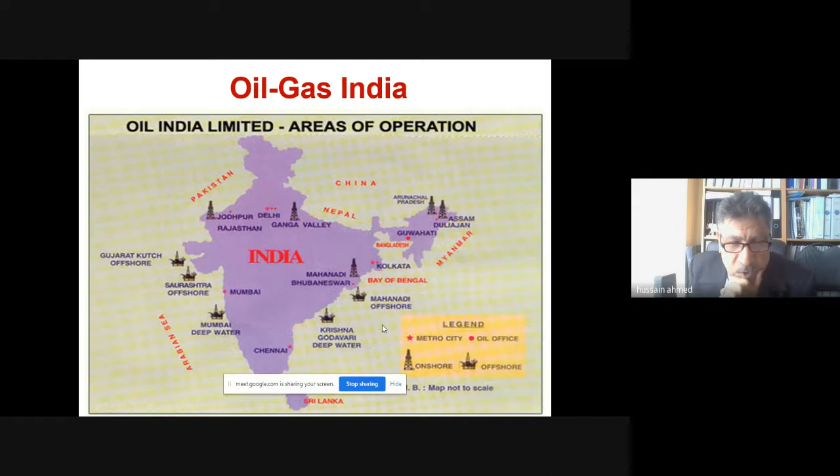And this small map shows you the location of the oil and gas, both onshore and offshore, present in India. I think that's your area, correct me. You are here, aren't you? You are in Rajasthan. And you have an onshore oil field here. Assam, the northeast, is rich with oil and gas, but your area is also rich with oil and gas. You have oil and gas also offshore, both on the east and west, such as in Mumbai High, the deep water. Offshore, you also have some oil and gas in the Chennai area. Most of the offshore is gas, and most of the oil is onshore. So you have some oil and gas in India which need to be developed.

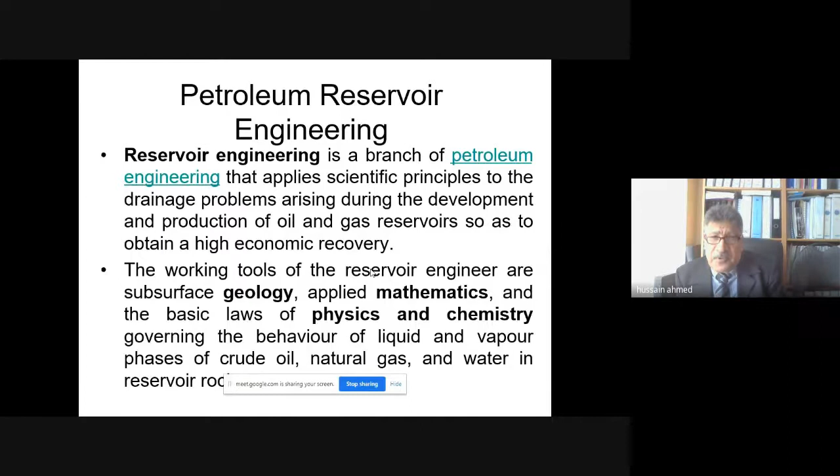And reservoir engineering also looks into how much oil in place, reserve, how do they calculate it? And also they look into the properties of the oil inside the rocks, such as: is it natural gas? Is it wet gas, dry gas? Is it heavy oil, light oil? So they do PVT and also economic studies.

The reservoir engineer also later on does something with enhanced oil recovery, EOR, such as water injection, gas injection, to maintain the pressure of the reservoir. So reservoir is quite an important topic within petroleum engineering.

If you graduate as a petroleum engineer, and then you specialize as a reservoir engineer, maybe MSc reservoir engineering, or you work as a reservoir engineer, these are some of the roles. A reservoir engineer will be responsible for estimating how much oil in place, forecasting the development, what do I need to develop in my reservoir, my field.

By the way, oil field and reservoir. Reservoir is smaller than the oil field. One oil field may be made of 3 or 4 reservoirs. Reservoir is the name of the rock that has the oil inside it. Reservoir is a French word, which means a tank or a vessel. So that rock having oil inside it, we can name it the reservoir. Sometimes we say reservoir formation.

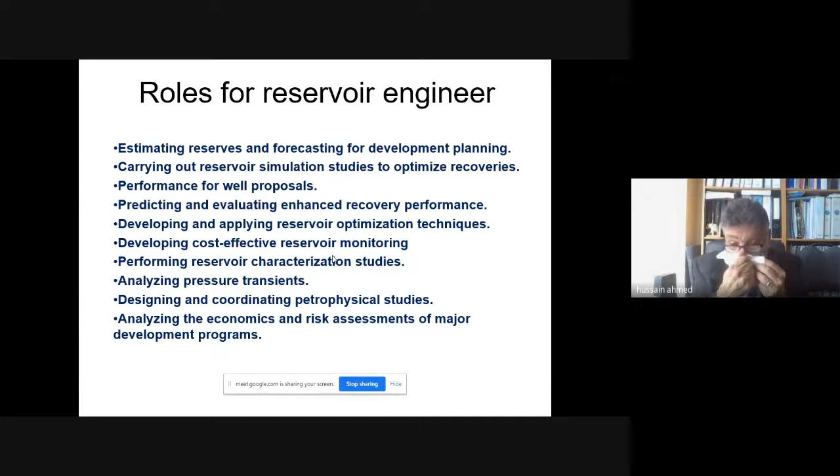The first oil well in the world was in Pennsylvania. It was drilled in 1859. It was only 70 feet or 69 feet.

The other thing about the reservoir, you need to know the rocks, because the oil exists inside the rocks of the reservoir. The reservoir rocks are of three types. Either sandstone and shale, which we call clastic sedimentary, or chemical rocks, and these are the salty rocks such as anhydrite and gypsum.

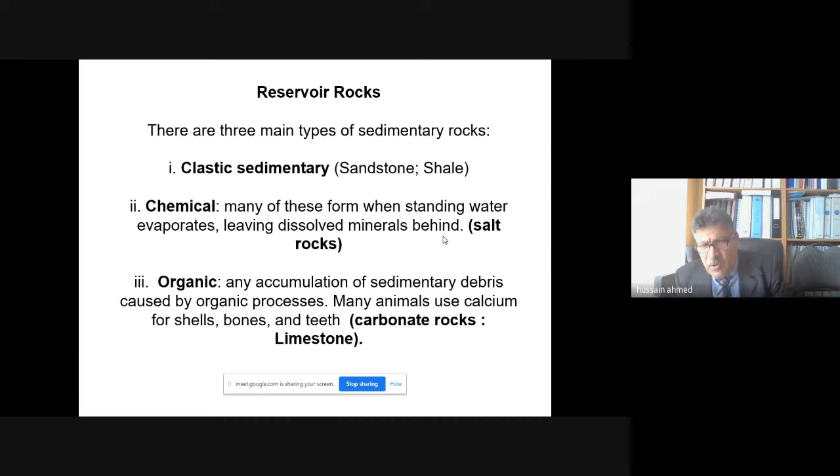And there are a few very small reservoirs made of salt. They call them the salt domes. I will show you some pictures later on. So remember, the name of the rocks where you can find oil and gas: either sandstone, shale, salty rocks, or the carbonate rocks, which is limestone

and dolomite. Of course, oil starts in deep rocks. They call them the source rocks. Source rocks are like the kitchen where you cook your oil first.

And then after that, the oil will move from the source rocks to the other type of rocks. A good example of source rocks is shale. So shale has oil. I'm sure you heard nowadays about shale gas and shale oil, which people try to get oil out of because they are source rocks.

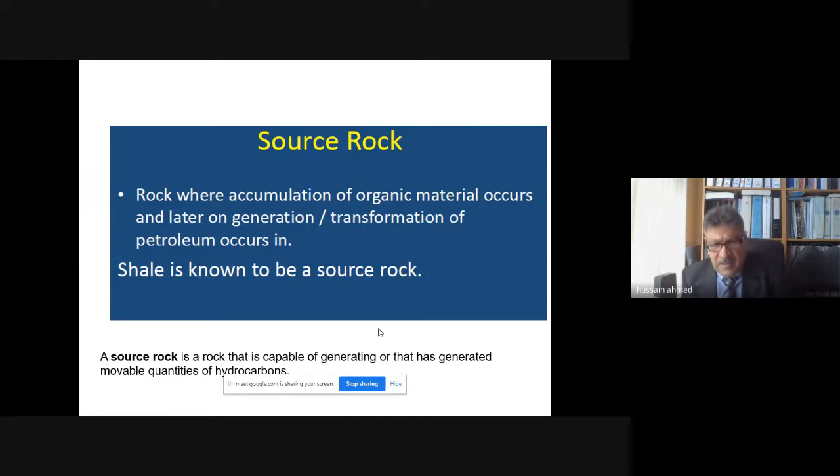After the source rocks, the oil being generated moves into the other rocks, which is sandstone or limestone or dolomite. They move in a process called migration. Migration is movement of oil from the source rocks to the other type of reservoir rocks, which you call the traps. The other types could be sandstone, limestone, salt domes, or shale.

And the movement will be either due to density differences, buoyancy, or due to hydrodynamic, which is kind of pressure differences, or capillary actions, which is the capillary movement. And therefore, we change from source rocks to other type of reservoir, which we call the reservoir rocks or the reservoir accumulation.

This is buoyancy. So remember, if somebody asks you how does the oil move from the source rocks to the reservoir, from shale into sandstone or into limestone, either by buoyancy or hydrodynamic or capillary action.

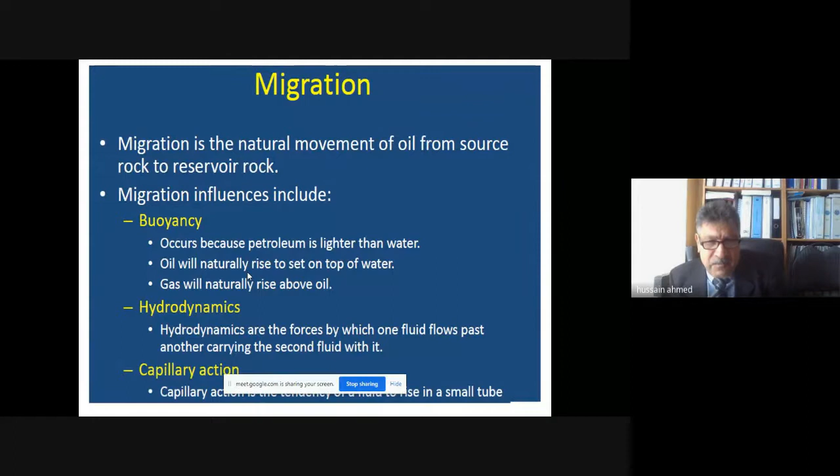For the students, if you have a piece of paper and pencil, make a note of this information because this information does not exist in books. It comes from my experience. So the buoyancy, and then explore hydrodynamics. I will pass very fast.

Then that movement of oil from the source, being captured inside the reservoir rocks, we call that traps. The oil being trapped inside that rock. The type of traps could be folding or faulting. As we said, we have fault and we have anticline. Stratigraphic, which is lithology, rocks on top of each other. Or sometimes we have a combination, which is a mix between structure and stratigraphy. I'll give you examples here, for example.

Nature, geology. I'm sure petroleum engineering year 1 and year 2 teach you some petroleum geology, and also civil engineers teach you some geology as well. You know geology, structural geology, soil, and so on. And I'm sure you heard about fault, like an earthquake.

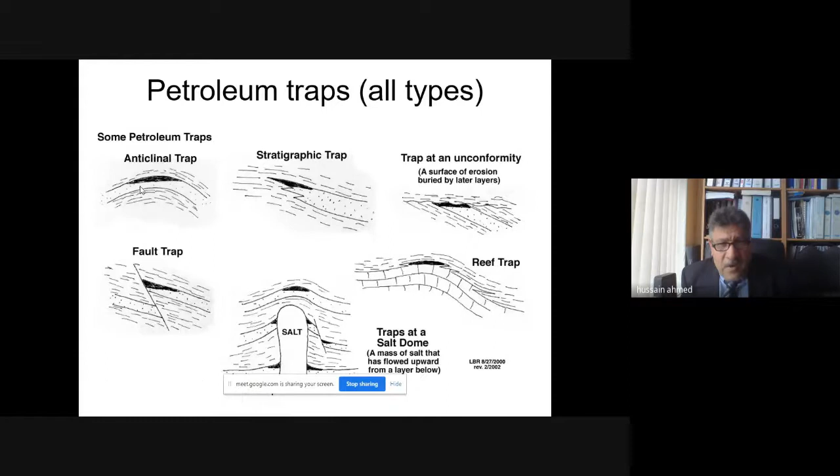The oil is trapped by movement from the source rocks because of buoyancy, hydrodynamic forces, and they move. If they don't find any seal rock, they will escape and you can see them on the surface of the earth. We call this a seep, the escape of hydrocarbon from underneath to the surface of the land. I have seen that in Iraq - we have so many seeps there, gas and oil, especially in the north part of Iraq. Sometimes the oil also leaks into the offshore under the sea because there's nothing sealing it.

That thing sealing it, we name the cap rocks. So this sealing rock, we call the cap rocks. If you don't have cap rocks, then the oil and gas will escape into the open nature.

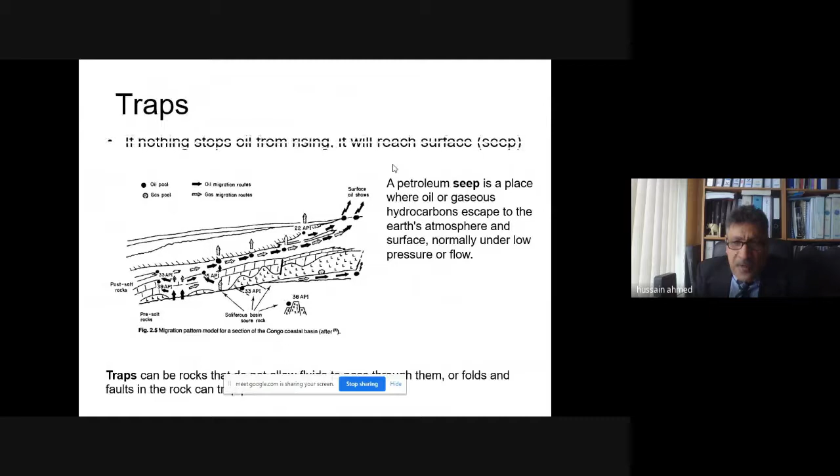These are the 5 elements in reservoir engineering. First, you have to have something called source rocks, where the oil starts to be generated because of high temperature and pressure, and the dead animals living here undergo organic changes that turn them into liquid. That liquid is the hydrocarbon, and then it starts moving after that.

So after source rocks, we have something called migration. Remember, these are the 5 principles in reservoir engineering: you have to have source rocks, then when the liquid is generated, it starts moving because the pressure in the source rock is high, so it moves from high pressure to lower pressure, either by capillary action, by buoyancy, or by hydrodynamic forces, and they move until they are captured into a piece of rock we call the trap rock.

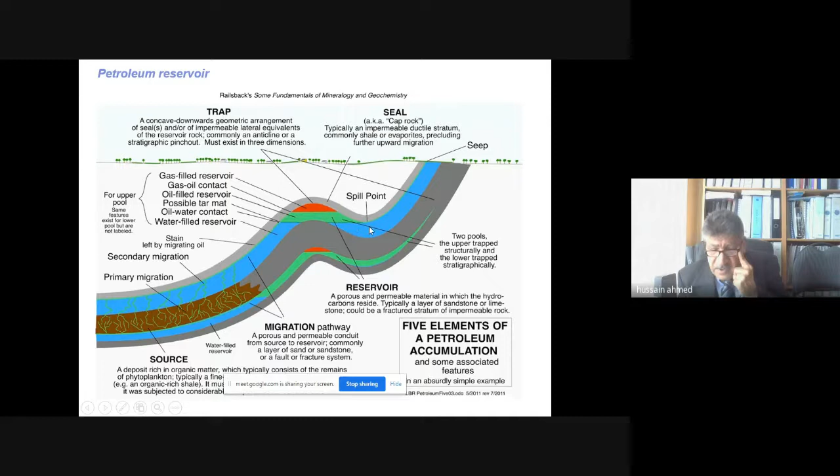That is the reservoir. It should have 2 or 3 important properties. One, it has something called porosity. Our lecture today is about reservoir properties. Porosity is the space where the oil will occupy part of the rock, the empty part. The oil will go inside this empty area, which we call porosity.

If the oil is moving from source to the reservoir, it moves through channeling inside the rocks. That channeling inside the rocks, they call permeability, permeable. So we have 2 important properties in a reservoir rock: one, it should be porous, meaning we have a space; number 2, it should have channeling.

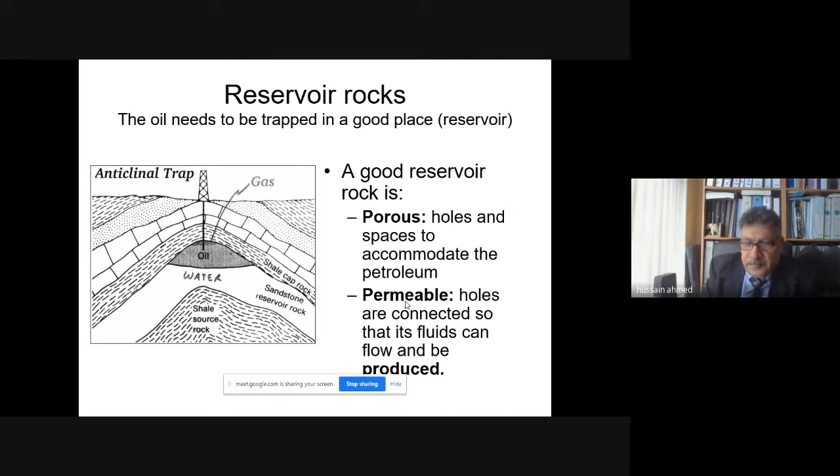So the oil reserve has a connection with porosity, with porous. And the oil production has a connection with permeability. This first word has a connection with how much oil is in the place, reserve. And permeability has a connection with production and movement. These are important features in the reservoir rocks. You should have porosity and permeability.

Porosity you can measure as a percentage. We say this rock's porosity is about, for example, the sandstone, limestone I mentioned to you already. Porosity is a percentage of the rock's voidage, or space within the body of the rocks. So if you say limestone has a porosity of 25%, then the space within that rock is 25% of its volume.

And maybe some of that territory is occupied by oil and gas. Does the oil and gas occupy all the porous volume? Sometimes no, it will occupy a percentage of it. So porosity is important as a space, a room to live in, to stay inside it. And then if the oil wants to move, it has to have something called channeling.

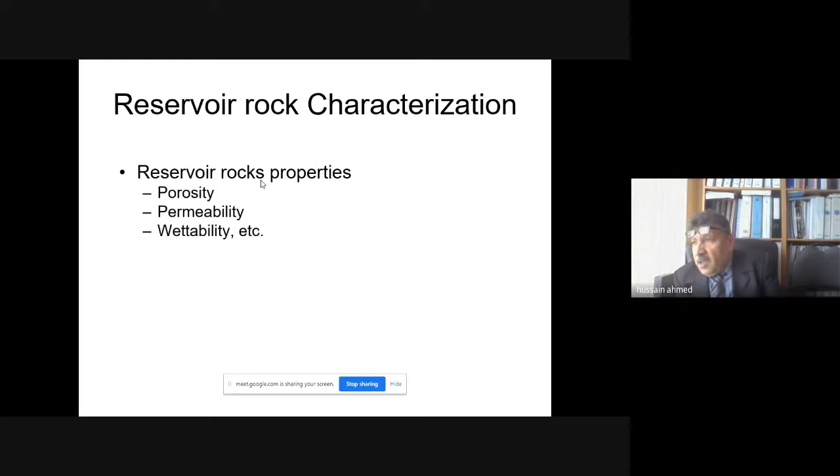So porosity, permeability, and the other important property we call wettability. Wettability is a tendency of oil and gas to saturate the rocks. So I have a piece of sponge, I put it into a pool of water. How does the water move inside the sponge and make it wet? That's wettability, the ability of the oil and gas to be adhesive to the body of the rocks. We will mention that later on as well.

The other important property of the rocks - remember porosity, permeability, wettability - number 3 is temperature and pressure. These temperature and pressure of the reservoir depend very much on the depth. There's a rule saying the deeper you go, the more the chance for gas accumulation, because you have high pressure and high temperature.

For example, on the y-axis, the depth in meters, after 4,000 meters you may find more gas rather than oil. But in a shallow area you may find more oil, though it tends to be heavy oil. For example, in Oman, if you get a job there, most of the oil fields are shallow and most of them are heavy oil.

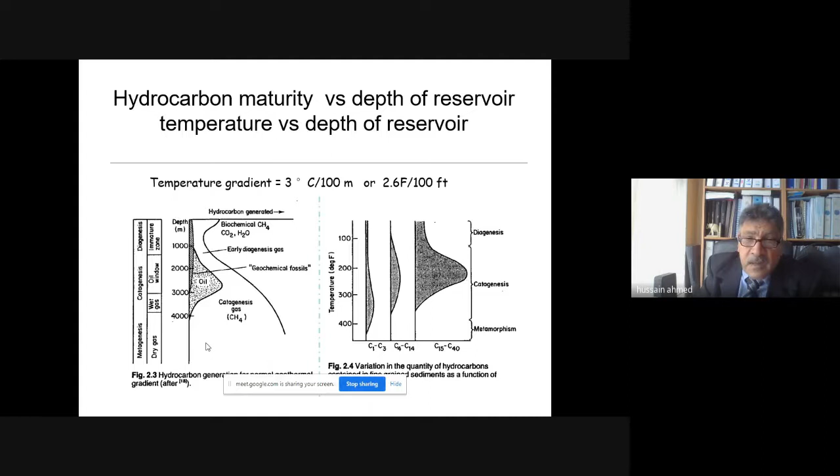You can predict the pressure and temperature of the reservoir by a small basic calculation. This is the way to calculate the pressure: PR of a reservoir equals 0.433 multiplied by depth in feet. So if somebody says my reservoir is at 10,000 feet, what will be the pressure? You tell him 10,000 multiplied by 0.433 equals 4,330 psi. That's the normal, most normal value.

Sometimes we have abnormal pressure, sometimes hydrostatic, and sometimes dynamic pressure. But generally we use the pressure gradient of 0.433. Sometimes it could be 0.44, sometimes 0.53, depending on the geology structure of the reservoir. But the majority are between 0.433, sometimes 0.456. The temperature also you can predict using this simple equation in Fahrenheit: surface temperature, maybe 70 Fahrenheit, plus 2.6, that's the temperature gradient.

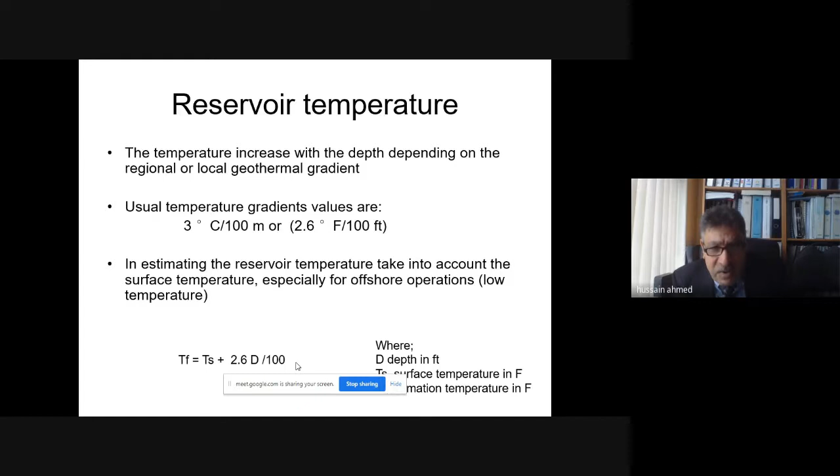So remember these properties of reservoir. We need to know about porosity, permeability, wettability, which is in other words saturation, pressure, and temperature. These are 5 important properties for a reservoir to be understood or to be followed. And we mentioned the reservoir pressure, how to calculate.

The rocks, we have mentioned rocks in reservoir could be sandstone, limestone, dolomite, and shale. 4 types of the rocks are very famous and common for reservoir: sandstone, limestone, dolomite, and shale. Most common, sandstone and limestone. Dolomite is less, shale is less.

And the properties, we say porosity, the pore volume, and porosity come as a percentage. So it's 20%, 25%. We have mentioned already these things. And this is the way they calculate porosity. I'm not going to show you how to calculate, because I'm not giving you an academic lecture. I'm going to give you a training. But as a petroleum engineer by now, if you are 3rd year petroleum engineering, you should be able to calculate porosity, or know how to calculate porosity.

Most of the oil fields around the world, porosity between 15% up to 25%. More than that is not good. It would be a loose sand production. We have something called interconnected, we have effective porosity, we have bulk volume, we have primary porosity, secondary porosity. You can talk about this very much, but for me, no time to talk about it in details. So primary, secondary, effective porosity, absolute porosity, different names you can talk about.

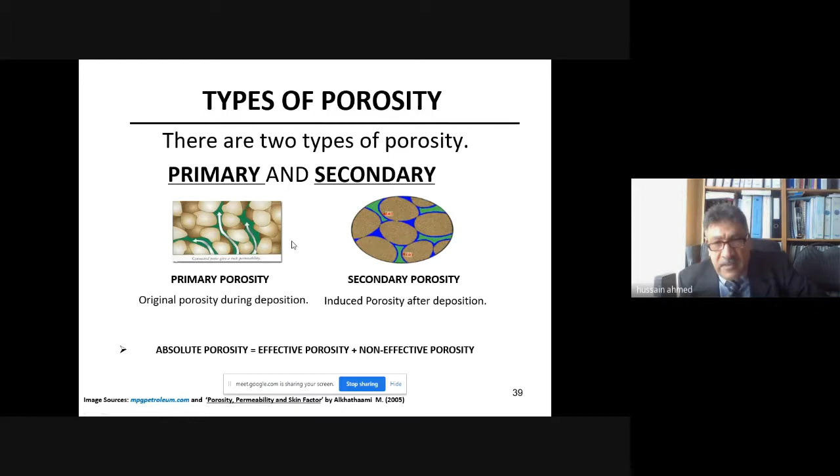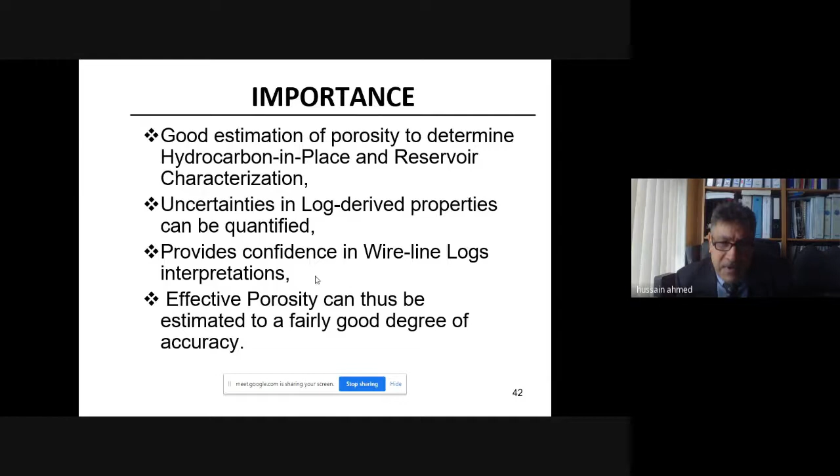Saturation of oil in the reservoir is a percentage of porosity. So if somebody said to me the oil saturation is 60% in that rock, that means 60% of the porosity is being occupied by oil. That's the meaning of it. I repeat again, if somebody said to me, we have 60% oil saturation, what does it mean? It means 60% of the porosity is being occupied by oil. That's the meaning of saturation.

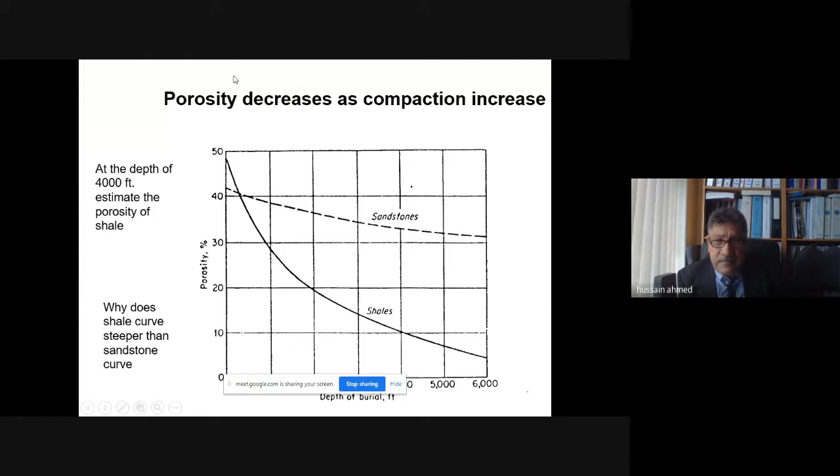Of course, porosity has connection with depth. The deeper the reservoir, the less the porosity. So as you go deeper and deeper, we will get smaller porosities because of the compaction. The other important property is for production. And remember now, porosity is good for reserve, how much oil in place, and saturation. Permeability is good property for production and movement, channeling.

And permeability tells me about the interconnection channels in the body of the rocks, which will make the oil move from A to B, from X to Y, due to the pressure differences. So the permeability is like small pipelines inside the body of the rocks, channels inside the body of the rocks. Permeability is measured in a unit called millidarcy, and the millidarcy sometimes is a very small unit.

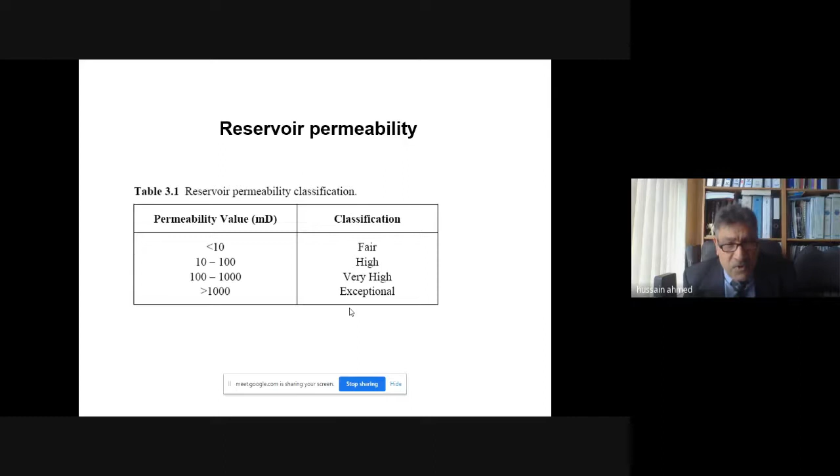The majority of reservoirs are within 10 to 100 millidarcies. Unless you have fracture, big channeling, we call it exceptional, we may get more than 1,000. But normal rocks have between 10 to 100. Limestone and dolomite, their permeability is larger than permeability in sandstone, because most of the limestone rocks are fractured. Just a piece of note for you.

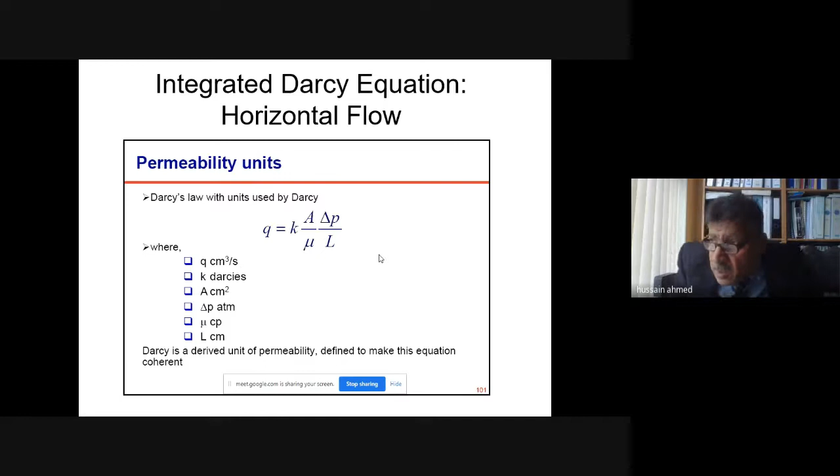So permeability is important in movement of oil in the body of the rocks. And they use permeability later on for the calculation of flow. So the flow, the movement, has a connection with permeability. But the storage has a connection with porosity. Remember these two words. Make a note of them. Permeability has a connection with flow and movement. Porosity has a connection with storage and capacity.

I will continue. This is the way they calculate permeability as K. And this is the equation used to know the flow inside the rocks. They call it the Darcy equation or Darcy law. I'm sure civil engineers know the Darcy law, and petroleum engineers also know Darcy law. Darcy law or Darcy equation tells you the movement of oil inside the body of the rocks.

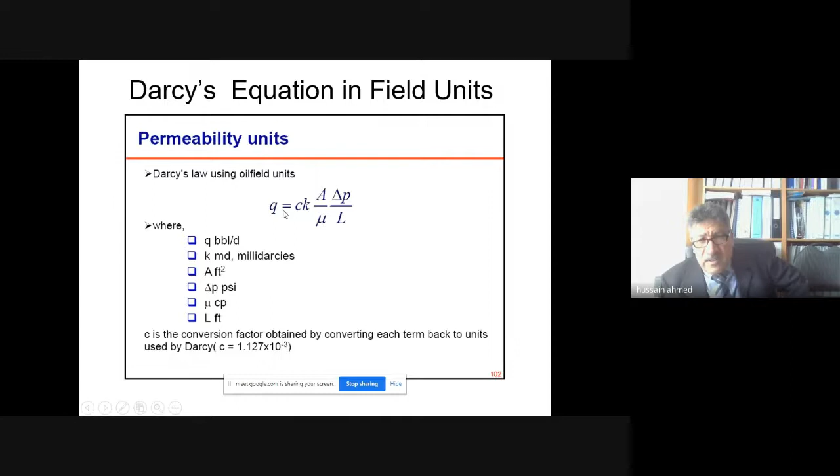Depending on the value of K, a constant conversion factor, the area of contact, pressure differences, the viscosity of oil, and the length, the distance it is moving, that tells you the flow rate, which could be written in field units. So if I work in Burgan oil field, Rumaila oil field, Saudi oil fields, and Mumbai Bay oil fields, they calculate the flow rate of oil using this equation.

That's why sometimes we need to do fracturing, sometimes acidizing, penetration, perforations, just to make the channels. So if the channels inside the body of the rocks, K, is very, very small, your production will be very small. You need higher production, then maybe you need to do fracturing or acidizing or perforation or horizontal drilling. K is very important for production. Very, very important.

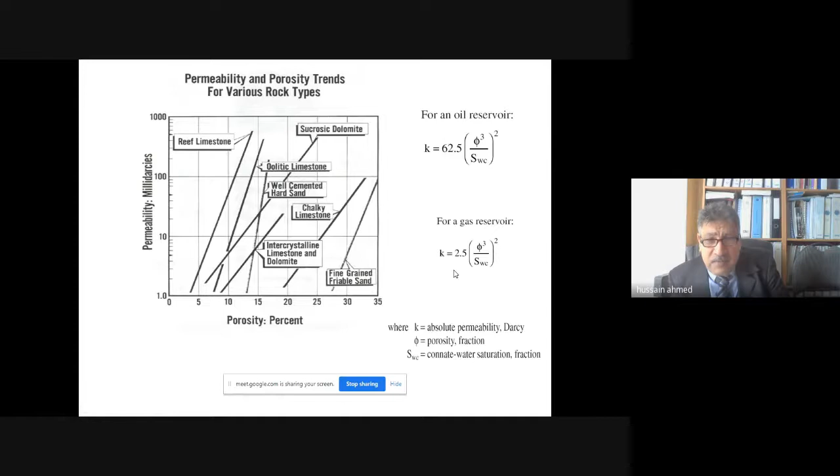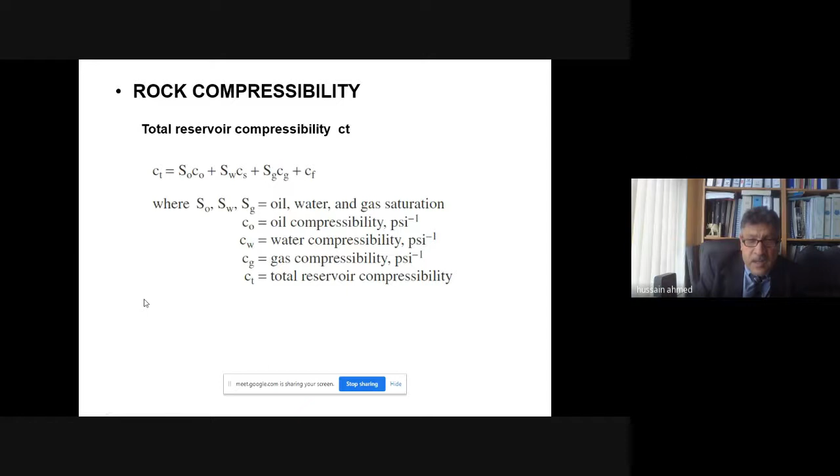The other property of the reservoir rocks is compressibility. If I take the oil out from the reservoir, then that reservoir will subside, get lower, crash down. That's a possibility. Small value, so the rocks could be compressible due to high pressure on them or due to taking the oil out of them. These are some equations to calculate the compressibility of the rocks, and this is the total compressibility. So the rocks are also compressible, and it's very important in offshore engineering to take that into consideration.

Because they produced the oil for 10 years, they took the oil from the reservoir, not much pressure to maintain the overburden pressure, so that caused subsidence, which is really a mechanical issue that could damage the pipelines, the casing, the cementing and so on. So it's also an important property to think about. I repeat them: porosity, permeability, wettability, compressibility.

I will come to more later on. These are important properties: the pressure and temperature of the reservoir. So pressure, temperature, porosity, permeability, wettability, and compressibility. Six properties so far. Make note of them. They are important properties of the reservoir. You need to know them. Tomorrow, if you graduate and get a job as a petroleum reservoir engineer, you need to know these things.

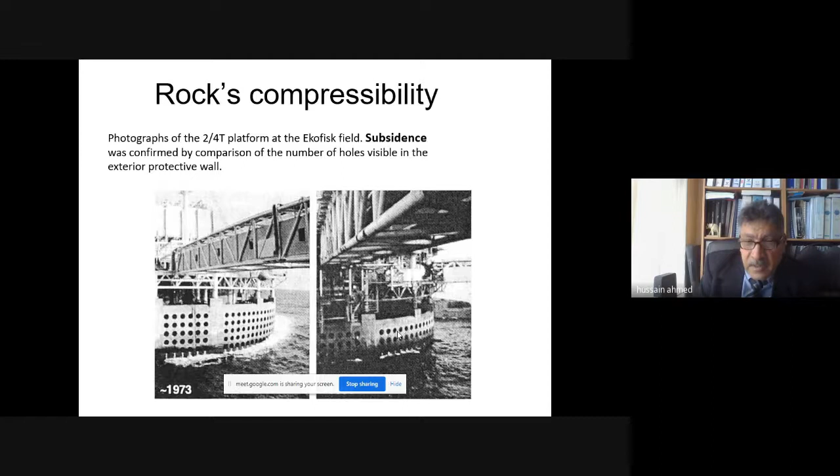Porosity, permeability, wettability, in between brackets saturation, compressibility, pressure, and temperature. Then you go to the properties of the oil itself. As part of reservoir engineering, you need to know the properties of the oil.

What is the type of my oil? Is it heavy oil? Light oil? Is it asphaltene? Is it a tar? Is it bitumen? Is it paraffin? Is it acidic or alkaline in terms of pH value? So you need to know these things as properties of the fluid inside the rocks. So you need to know the rocks and the fluid in the rocks. And these are some of the properties you need to be aware of.

The crude oil existing in the rocks could be classified as black oil, the most common, the crude oil, natural oil, I can say. The oil we put in the refinery. Or the volatile, which is a very light oil, very, very light. Condensate is merely gas with liquid inside it. And then we have the wet and dry gas. So we have 4 types of hydrocarbons existing in the reservoir.

The normal one, crude oil, could be heavy or light. Volatile is very, very light, but it has more gas inside it, high shrinkage. Condensate, these are almost gas at normal temperatures. In chemistry, they are made of C5 and C6, pentane and hexane. Or we have gas reservoirs. As you say, in India you have so many gas reservoirs around Mumbai and around Chennai, the east.

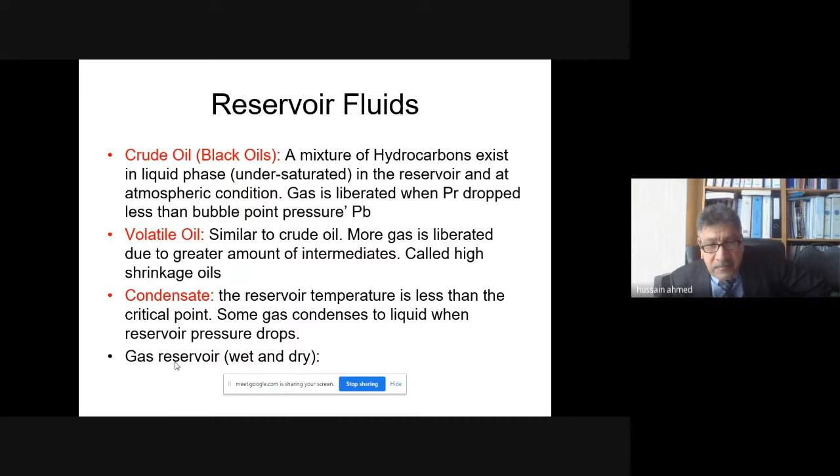These are some properties of black oil, the normal crude oil. The API is between 20 to 30, maybe 35, something like that. We call it medium or light. The GOR of it is, we're going to talk about GOR. GOR is how much gas will be liberated if you produce 1 barrel of oil. Every barrel of oil you bring to the surface, gas comes out of it. We call it the associated gas. Some people say APG, associated petroleum gas.

So if they say 500, that means we can produce 500 standard cubic feet for every stock tank barrel. For every barrel of oil I bring to the surface, 500 cubic feet come out of it. That gas I call the GOR, or the associated gas. The oil, when it comes to the surface, will shrink a little bit because gas comes out of it. That shrinkage factor, they name it formation volume factor.

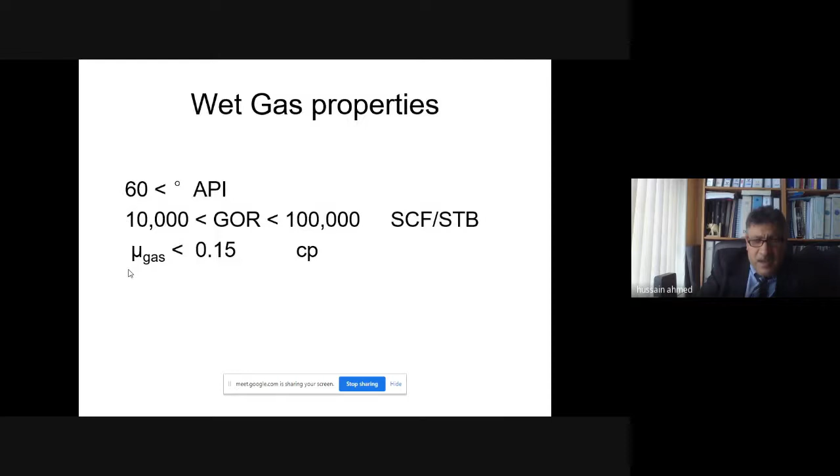So remember now, as an engineer, the properties of the oil I should be aware of are API, the gravity factor they call it, and API stands for American Petroleum Institute. I need to know GOR, formation volume factor, which is Bo, and the viscosity. These are 4 important properties.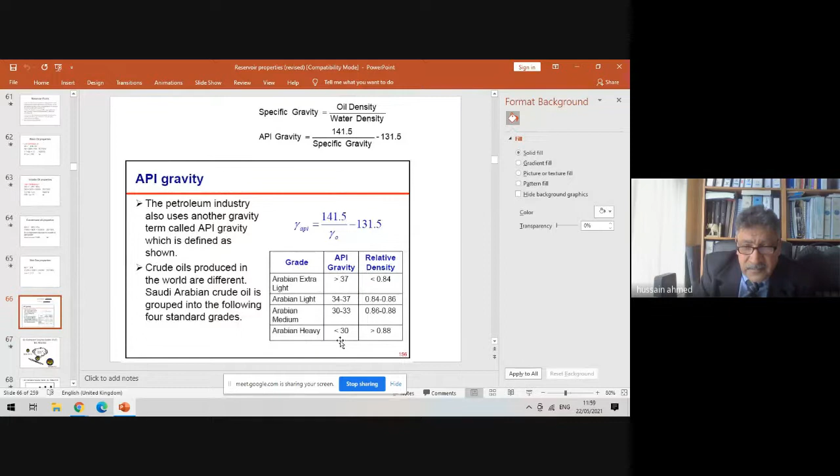So anything more than 37 API, we go to extra light or light or medium or heavy according to the value of API, which has connection with specific gravity. I hope that's clear. And remember, the title of my talk to you today, my lecture, is the properties of reservoir. So you need to know properties of the rocks, properties of the oil and gas, and then the interaction between oil and gas and the rocks. So this is an important thing you need to be aware about.

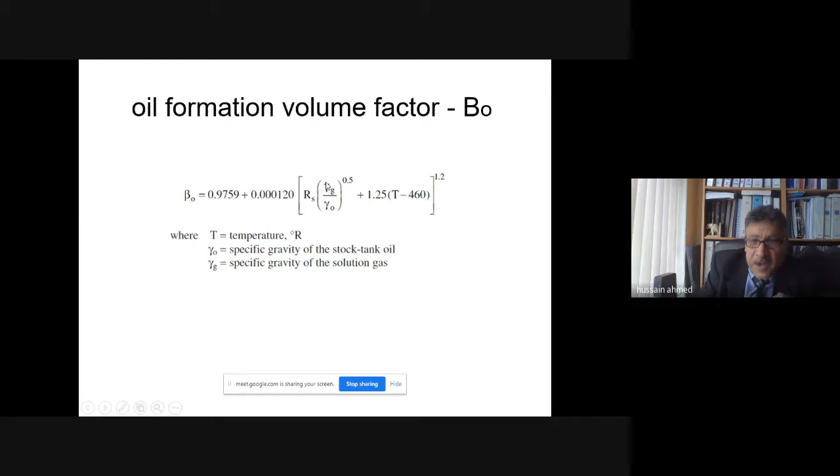And these are the shrinkage factor we mentioned to you. This is the way they calculate shrinkage factor, the formation formula. When we say it is 1.5 or 2.5 or 3.5, how much they shrink, they calculated using this equation. As you see, it has connection with gas solubility, temperature, and with the API for oil and gas. This is the behavior. So as we are producing, the volume will increase, and then the gas comes out, and that we call the bubble point pressure.

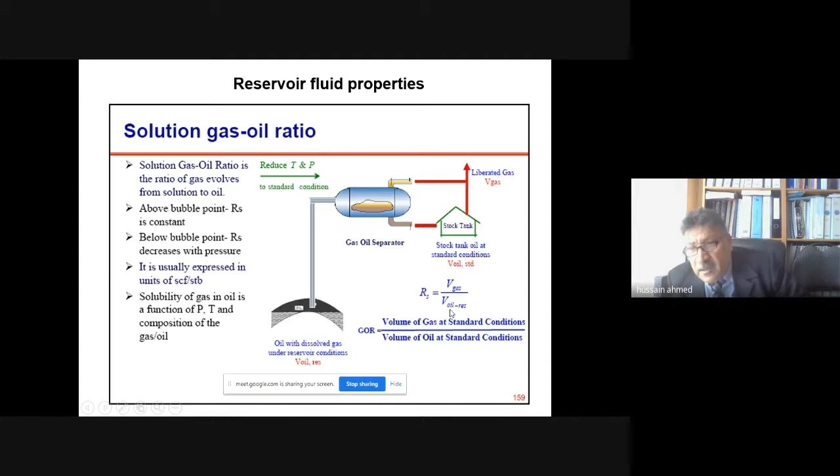GOR, I mentioned that to you as well, is a ratio of how much gas for every barrel of oil. So volume of gas over volume of oil in the reservoir condition. The solution gas, again, how much gas can be dissolved, and this is the equation for it. We have other properties for the gas behavior or oil behavior called the bubble point, the pressure at which the gas will be liberated. You need to know this.

So I repeat again, what do I need to know about my crude oil properties? I need to know the API, density, viscosity, shrinkage factor, gas solubility, bubble point pressure. I need to know these things about my oil and gas properties in the reservoir, mainly oil properties. Remember, my lecture is about properties. So properties of the rocks and properties of the fluid, mainly the oil.

The bubble point pressure is the pressure at which the gas will start to liberate; it will change from RS into GOR. With RS, the gas is still inside the body of the oil, it didn't come out. If the gas comes out of the oil, I name it GOR. When does the gas come outside the oil? When the pressure is less than bubble point pressure. Very simple. Remember these things.

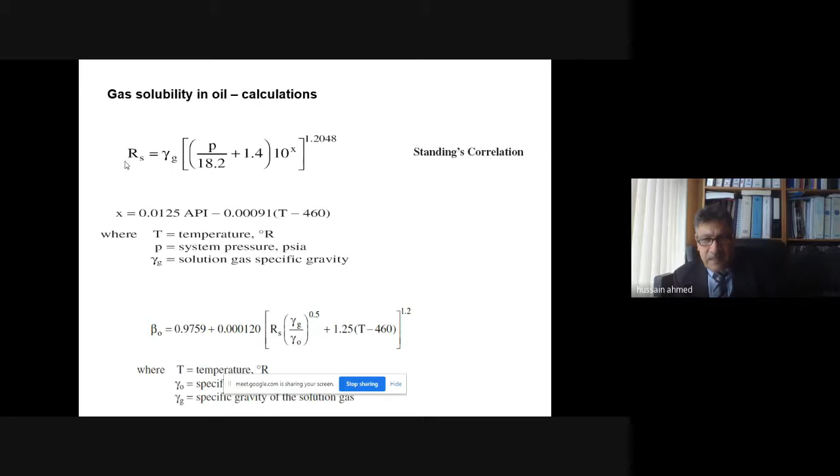How can I calculate the bubble point pressure? Can I predict it? The answer is yes. Somebody put an equation for us. This is the equation to calculate the value of the bubble point pressure in PSI, PSI absolute. I need to know the temperature of the reservoir. I need to know the API of my oil. And I need RS and specific gravity of gas. If I have these data, I will be able to calculate the bubble point pressure, which is an important property for oil.

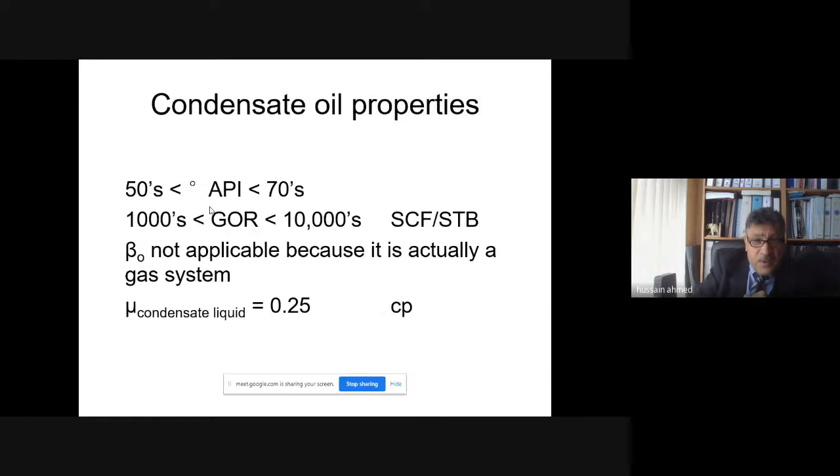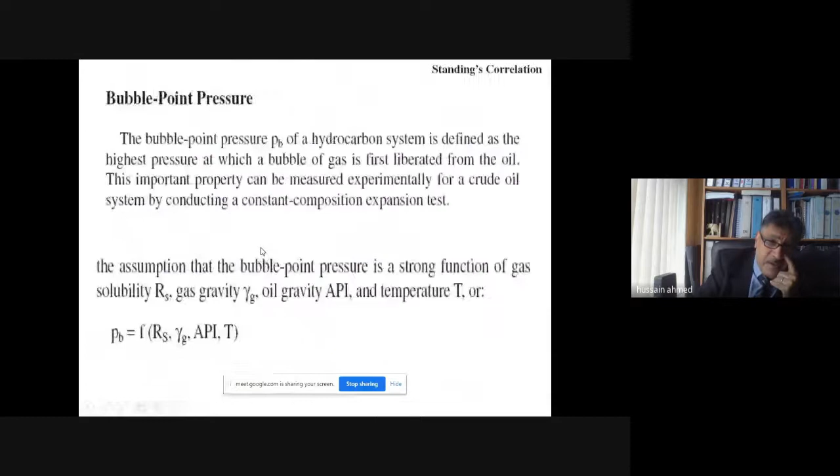Remember, this is all part of reservoir engineering. You need to know all these things to be a good reservoir engineer. So the oil could be lighter, easy to flow, or heavy, difficult to flow. If you are a mechanical engineer or chemical engineer, I'm sure you heard about viscosity. And viscosity, if you ask Google, it will tell you, is resistance of fluid to flow.

This is the way they calculate the viscosity. We have two types of viscosity. We have dynamic. We have kinematic. Stoke, centistoke, and we have centipoise. This is the way I calculate the dynamic one, the oil viscosity moving inside the rocks. Again, you need to know the API. You need to know the temperature of the reservoir to help you calculate the value of X and Y and Z.

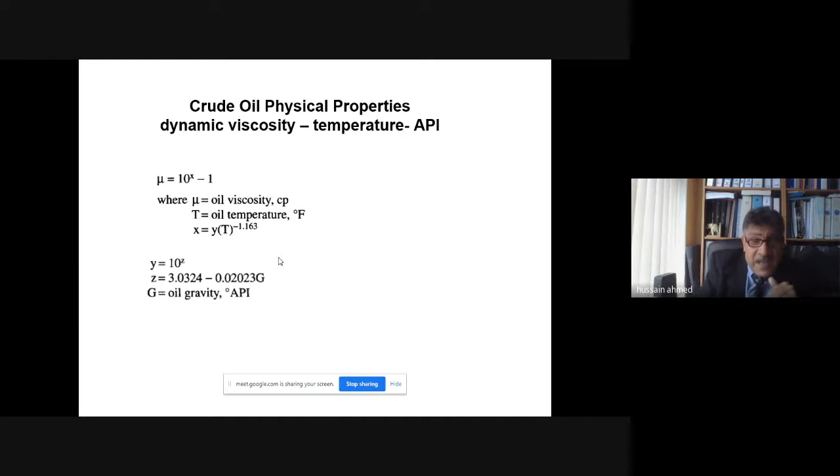This is the equation to calculate or to change. You can change it from kinematic into dynamic, or from dynamic into kinematic, by dividing by the density of the oil or specific gravity of oil. I hope that's clear, and it's important for you to talk about movement of oil in rocks. The more the viscosity, the more difficult the movement, difficult to produce.

That's why sometimes they do something, in India they do it as well: steam injection. I'm sure you do it in India. Or sometimes you do in situ combustion. You're burning the reservoir near the producing well to reduce viscosity, to make it easy to flow. So heavy oil sometimes needs some kind of engineering intervention, by injecting hot water or injecting steam, or you do in situ combustion to produce oil out.

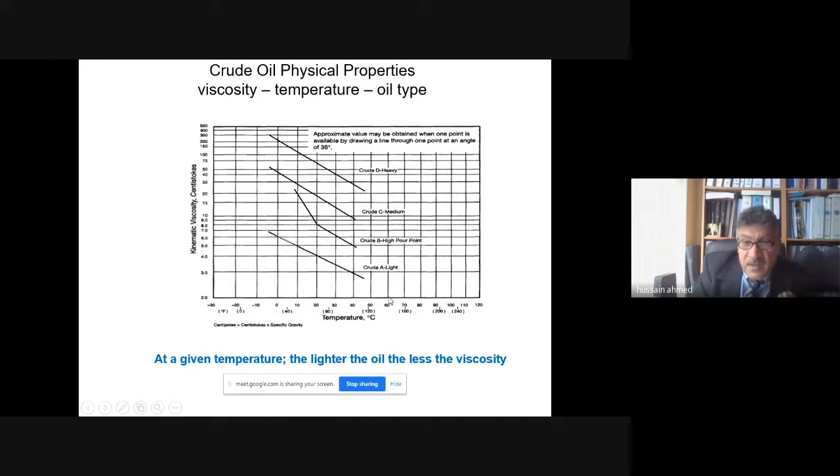These are some of the curves regarding temperature and viscosity. Clearly, the higher the temperature, the lower the viscosity. Temperature is on the x-axis, kinematic centistokes on the y-axis, and different API curves. So if somebody says to me, the API of my oil is about 30, and the temperature of my reservoir is, for example, 50, I can read my viscosity and change it from kinematic into dynamic. And then I decide, shall I do water injection, or steam injection, or in situ combustion, or something like that.

I'm aware of the time, so I need to speed up a little bit. So, reservoir fluid distribution now. As a reservoir engineer, you should understand rock properties: porosity, permeability, wettability. You need to understand your oil properties, such as viscosity, density, API, gas solubility. You need to understand your rock properties, such as compressibility, pressure, temperature.

The other properties you need to understand now: what is the interaction? How do the oil and rocks behave together? How does the oil behave inside the rocks? That is the interaction between rocks and the fluid: oil, gas, and water. With that interaction, you can look into more properties such as the zonation. Where does my oil exist? In the middle or on the upper part? The oil-water contact, I mentioned to you already, zonation.

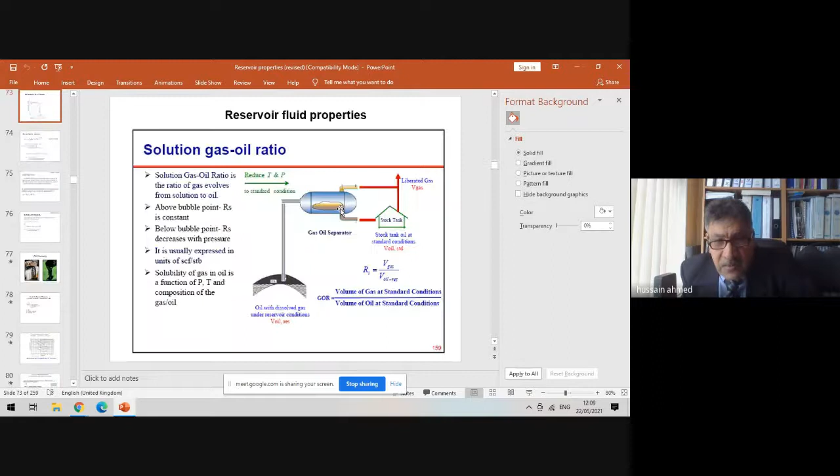I need to understand how the oil will interact with the rocks. That could include saturation, capillary pressure, surface tension and interfacial tension, wettability, which I mentioned earlier, the contact angle, and the transition zone. So in terms of distribution, or zoning, I have a zone for gas, a zone for oil, a zone for water, and contact areas between them, WOC, water-oil contact, and GOC, gas-oil contact, and between them there's the transition zone.

So in this transition zone, for example, I have oil, I have water, and between oil and water I have some kind of a mix between oil and water. We call it the transition zone. If I take a sample here, maybe I have 70% oil, 30% water. If I take a sample from the bottom, I may have 70% water and 30% oil. This is also an important part of reservoir engineering to be understood.

Remember, my lecture with you is about reservoir properties, so I'm covering everything you think about. Of course, there's calculation behind them, mathematics behind them. I'm not teaching here, I'm just giving a lecture or a training. Maybe in the future we will arrange some teaching sessions for you.

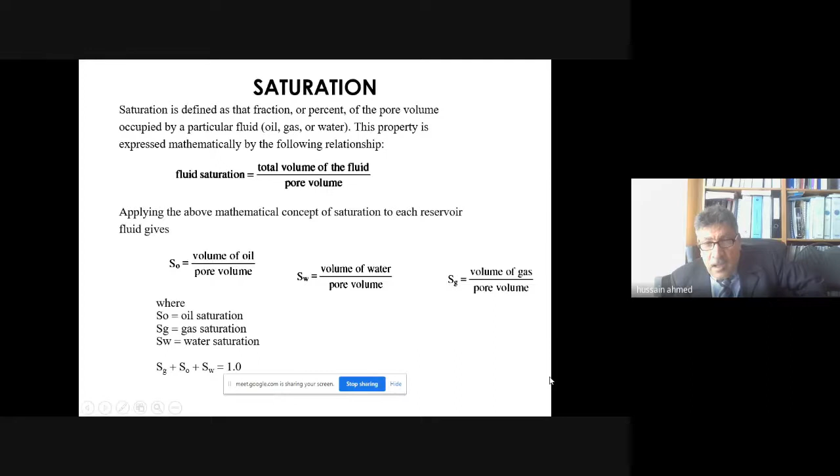And that is what we call it like this. We could have, maybe, gas at 10%, oil at 80%, 10 and 80 is 90, and water is 10% again.

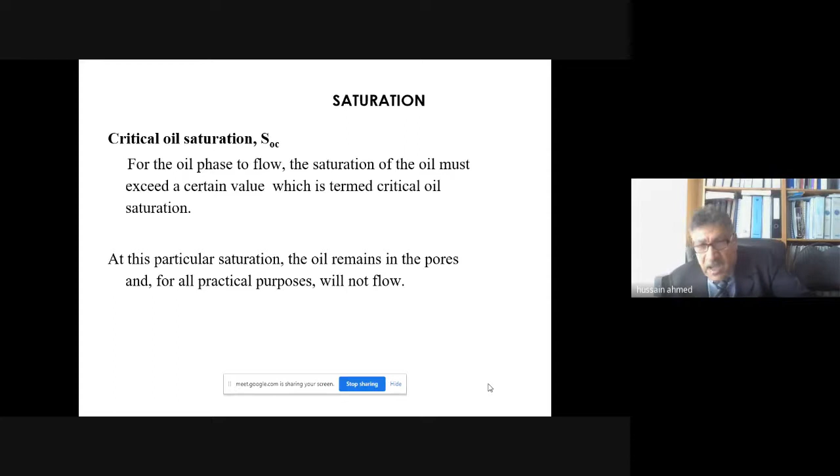Saturation could be, say, critical, sometimes residual, sometimes movable - mobility - but they have different names according to their value.

Residual and connate: connate is not moving, difficult to move. Residual is after production, how much is being left behind. So maybe I start with the reservoir as brand new, 80% oil saturation.

After 10 years, if I measure saturation, it could now be 20%. From 80 to 20, that 20% I can name as SOR, residual. If I go less than that, I will call it connate.

Connate is sometimes what I leave behind - I cannot move it. So the movable one is the one in the middle, where oil is still producing. It could be 50%, could be 35%.

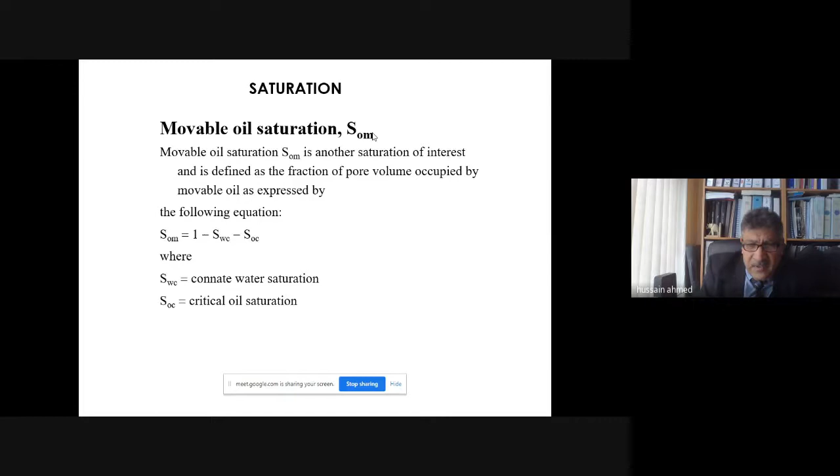The other interaction between rock and fluid is capillary pressure, which has a link with wettability. I mentioned wettability and wetting. Capillary pressure is the natural movement of oil inside the rocks against gravity, going up, and has connection with surface tension as well as density and the angle of contact. So it needs some calculation in physics, I can say.

The IFT, the interfacial tension between the rocks and the oil, or between the oil and the water, or between the oil and the gas, is also used to calculate capillary pressure. This is the way to calculate capillary pressure - it's the pressure responsible for the oil going inside the capillary channels.

For example, here the water goes inside the channel. So I have a channel and the water goes up against gravity. That distance h, how far it moves, we call the capillary height. And if you know the height, the density difference between oil and water, and the contact angle theta,

cosine of it, and the radius of the capillary tube, which is usually a very small number - 10 to the power minus 4 of centimeter. We talk about microns actually, 3 or 4 microns for the radius, with the gravity factor. So against gravity - movement of oil or liquid upward against gravity - that's why you have a gravity factor.

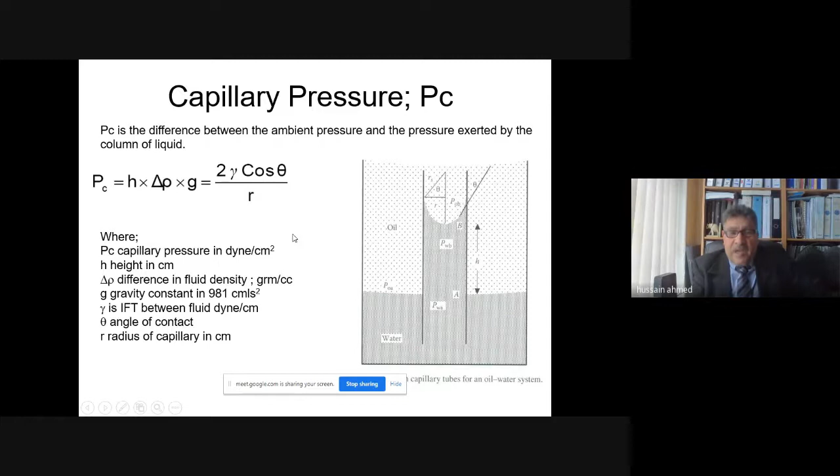Capillary pressure is also important later on for water injection, gas injection, movement of oil, migration of oil. It has some connections. So as a reservoir engineer, you need to study this. Capillary pressure - you can make even a master's thesis about it, it's a big topic.

And there's a connection between capillary pressure, channeling, and permeability. The wider the rocks, the higher the K value, which is permeability, the smaller the capillary pressure. But as the channel gets very, very narrow, you get a high capillary pressure. So the pressure is responsible for making the liquid move upward inside the body of rocks against gravity.

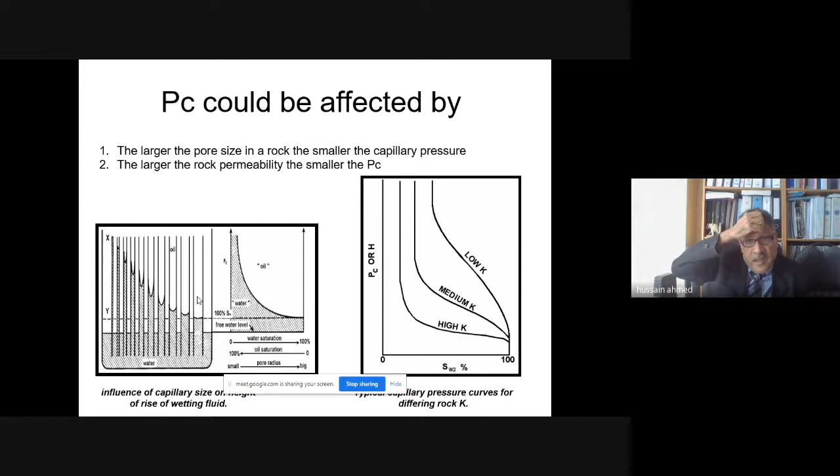That's capillary pressure - a simple definition: it's the pressure responsible for the movement of oil, liquid, or water inside the channels of the rocks upward against gravity. So the smaller the K, the more the PC. The smaller the permeability, the more the capillary pressure.

And these are some examples of the distribution and gradient. As I said, it's a big topic - this session is not enough to talk about it fully, just to give you a flavor of it.

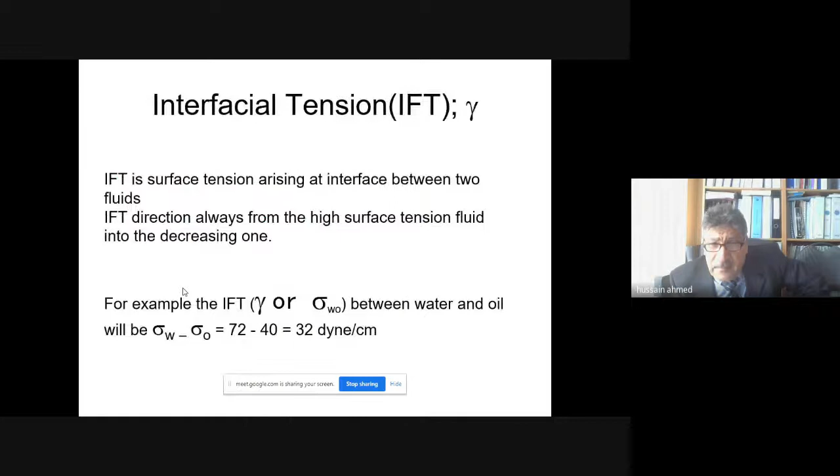We also have, if you remember, what we mentioned as the transition zone. I'll show you on this slide - let me go back. Transition zone: in this zone there's a mix between oil and water, there's no sharp cut. So I also need to understand the transition zone's thickness, location, and other things.

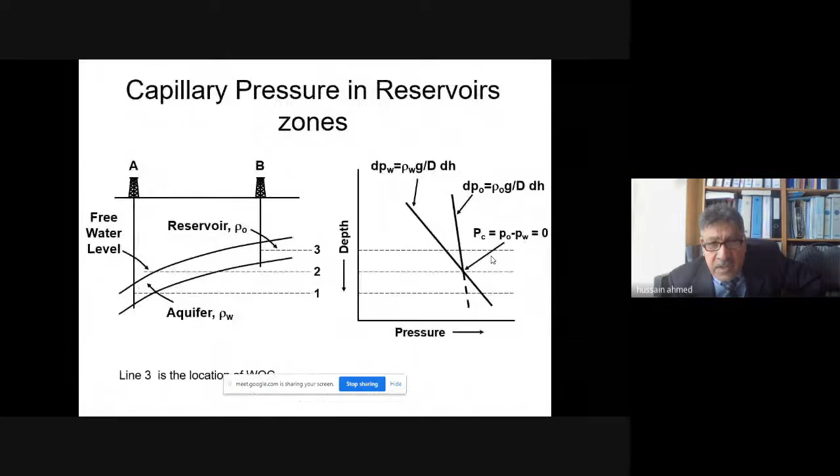One of the ways useful for that is to think about the free water. When shall I get free water? At what depth?

As a reservoir engineer, you need to know where your free water location is, because that's important in water injection later on, and it has a connection with the capillary pressure, PC, as well.

So the properties important for me are: capillary pressure, transition zone, water oil contact, gas oil contact, wettability as well, and interfacial tension, the IFT, the surface tension between oil and water - also important for me.

And these are about wettability. Wettability is the tendency of oil or fluid to stay on the surface of the rocks, unable to move easily.

For example, it's very easy for me to move the mercury, more difficult to move the oil, and even more difficult to move the water. So the smaller the contact angle, the greater the difficulty to move.

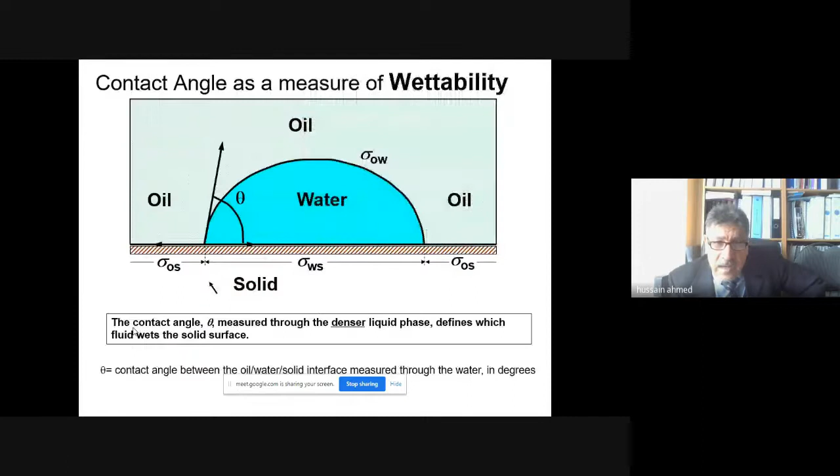So we call this a water wet reservoir, and here a non-wettable reservoir. If the angle of contact is less than 90 degrees, I call it water wet rocks or water wet reservoir rocks.

That means the rocks love to have the water inside them. They don't make the water move away. That's very important in water flooding later on.

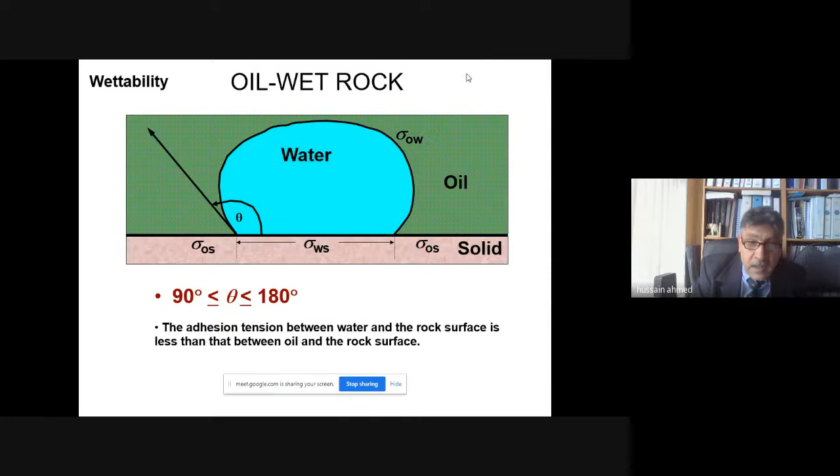Or you have this other case, something similar, where the angle is more than 90 degrees, as you see in this slide. This is what we call the oil wet reservoir. So here we have water wet reservoir and oil wet reservoir.

Both of them have properties that need to be understood, and that's very important to take into consideration depending on what you're going to do later on: shall I do water injection, gas injection, flooding, or shall I leave the well? Do I have water production or not? These are important to keep in mind.

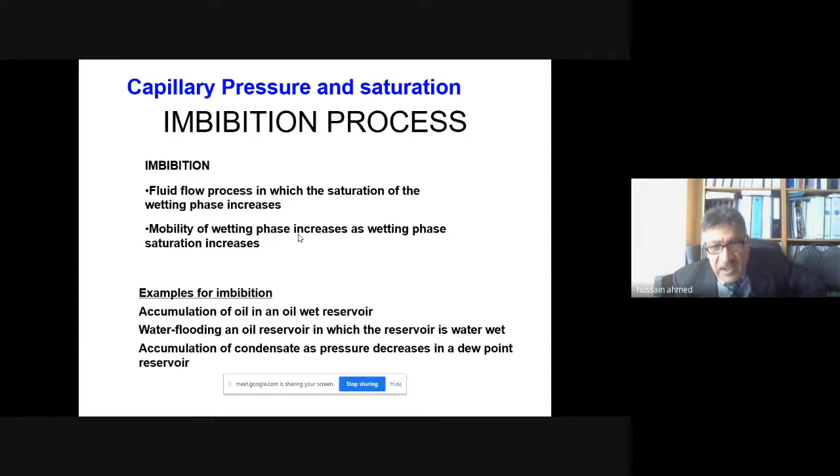As interaction between rocks, we have something called imbibition - that means saturation is increasing by injecting some water - and we have drainage, when I produce oil, so I'm draining the oil from the reservoir. So imbibition and drainage are both important for a reservoir engineer.

Later on the surface, you can do more reservoir work, such as PVT analysis, to tell you how much gas, how much oil density, oil gas solubility - these are also part of PVT.

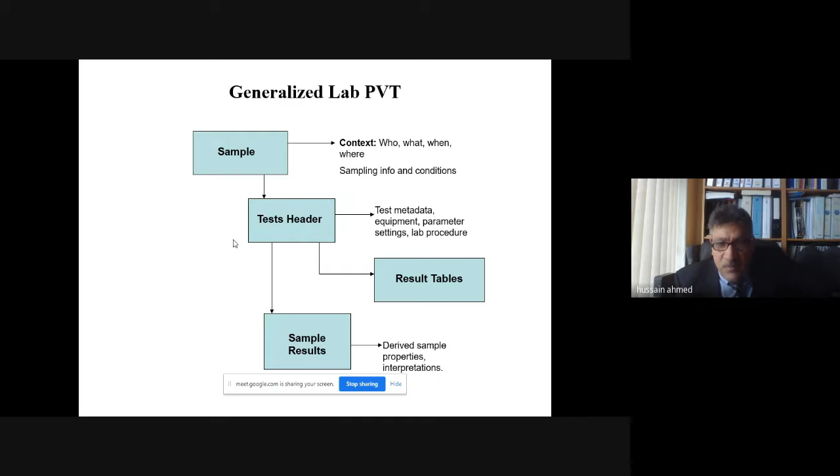I will move fast now because of the time; I have only 10 or 20 minutes. But remember, PVT is important to tell you the type of the oil, which I already mentioned - whether it's black oil, light oil, or heavy oil - the PVT will help you.

And PVT envelope, phase diagrams - these are also part of reservoir engineering. So reservoir engineering is a crucial subject in petroleum upstream, and you need to be aware of it.

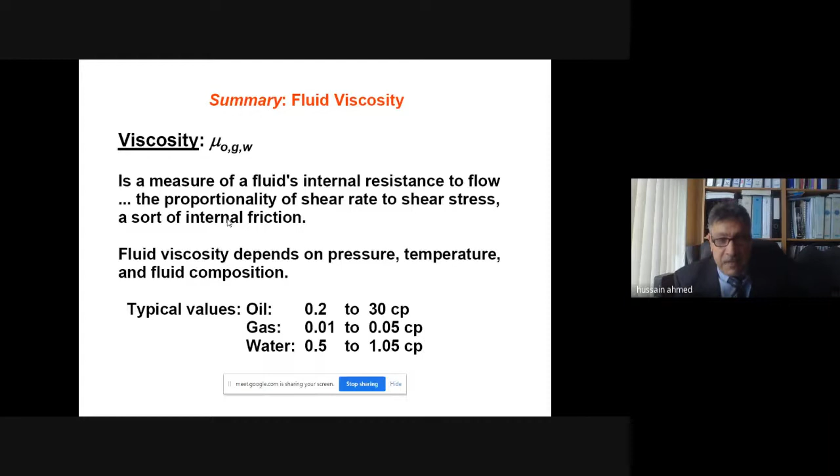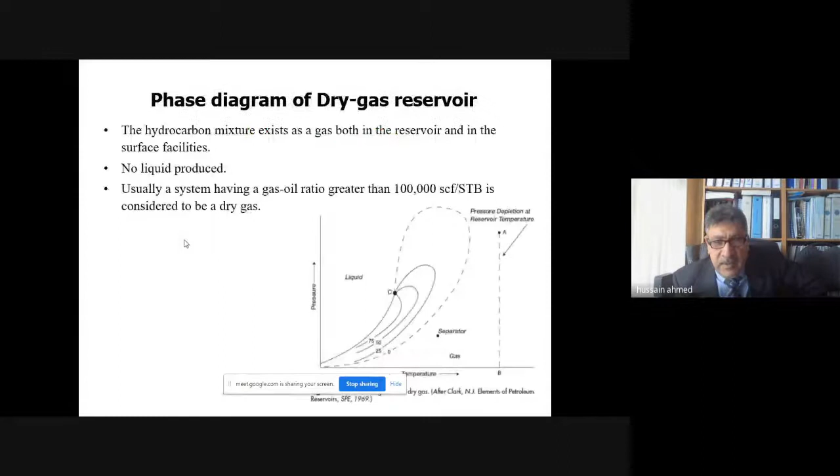I already mentioned this for you, classifying the reservoir as volatile, black oil, gas reservoir, condensate reservoir, and so on. Maybe in the future, if we have more time, we will talk about these in detail, maybe with more lectures or another semester.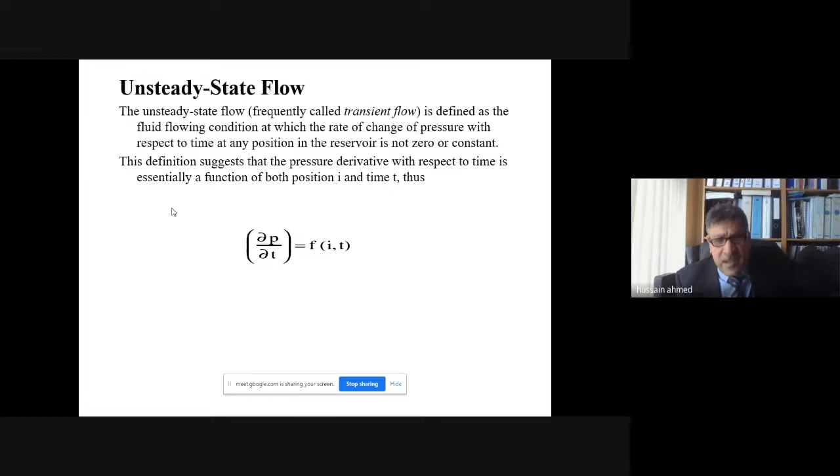So fluid flow inside the rocks will behave according to the Darcy equation, which I already mentioned to you. The Darcy equation has to include factors such as viscosity, compressibility, oil density, pressure differences, whether steady state, pseudo, or non-steady states.

All these are important. As I said, I cannot cover everything in 90 minutes, but I already mentioned Darcy. We can talk more about the Darcy equation in the near future and how to use it in our oil industry for both gas and oil, as well as for linear and radial flow.

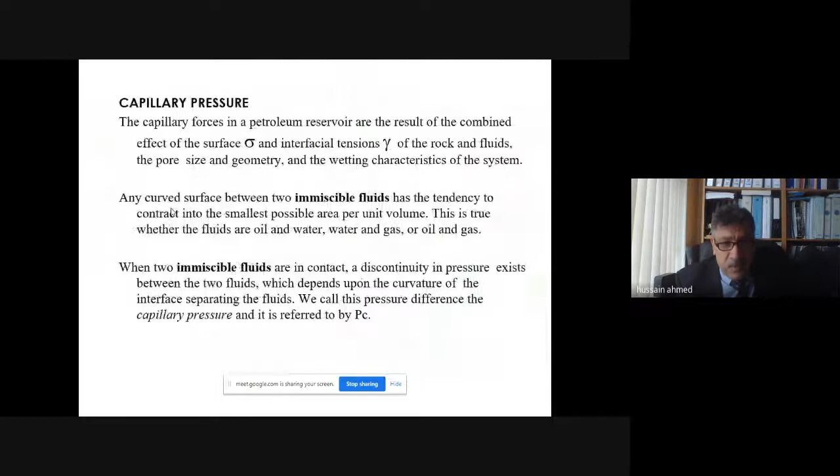I've already mentioned these, so it's very good - I actually covered some of them. I just want to come to the final part of my lecture.

That is the drive mechanism. From nature, the oil can come to the surface by some mechanism inside the reservoir. We call it primary recovery. These could be a gas cap or water drive underneath, and that will give you the recovery.

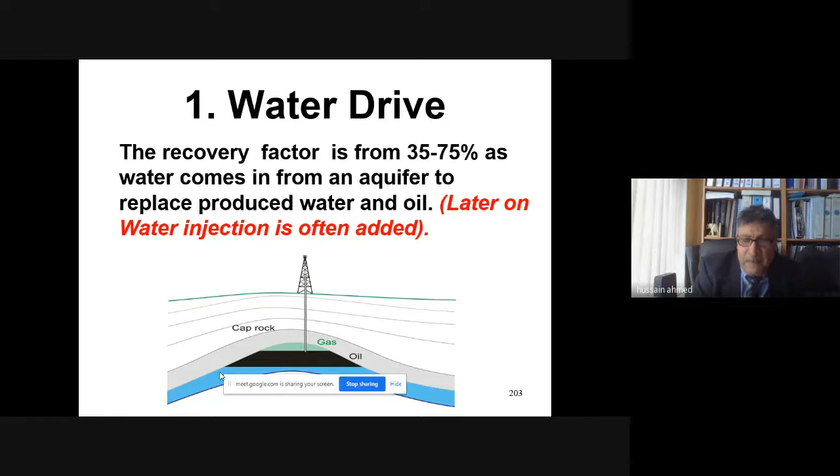For example, in this reservoir in front of you, there's a combination of gas cap energy as well as water energy, the blue one. Combined together, that helps move the oil to the surface because they have too much pressure inside them, and they push the oil to the surface once we finish drilling the well. That's called water drive.

Again, they have something called gas cap drive and water influx. All these are important, but unfortunately I cannot cover them all in only 90 minutes. The gas cap, we have something on top of the oil like this, a gas cap that has energy inside it. It wants to expand, pushing the oil into the producing well. That's natural energy. Sometimes also you have dissolved gas, gravity, and so on.

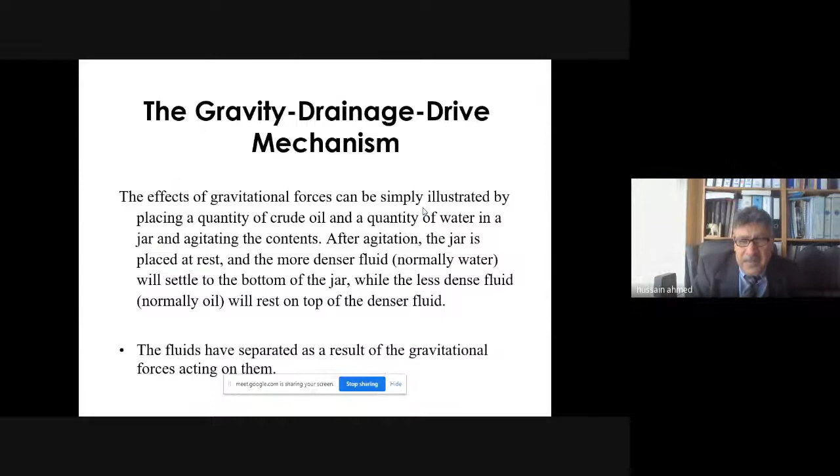If the natural mechanism is depleted and we have no more energy from nature, what shall I do? The answer: you put something called EOR, enhanced oil recovery. The engineer tries to inject energy inside the reservoir, inject water, inject gas, and we call it in this case secondary recovery or enhanced oil recovery. EOR stands for enhanced oil recovery by the intervention of the reservoir engineer.

So you, as a reservoir engineer in the future, should also have understanding of EOR. I'm assuming that in your college they teach you some of these topics. So that barrel of oil, maybe 25% you produce by having nature, water drive, gas cap. Or secondary - what's secondary? Secondary is EOR, water injection, gas injection.

And the remaining by tertiary. What's tertiary? I inject surfactant, polymer, steam, hot water to get the remaining oil. So 25 and 20 makes 45%. The remaining 55%, I may recover 30% of them, or half of them, by using steam injection or chemical injection.

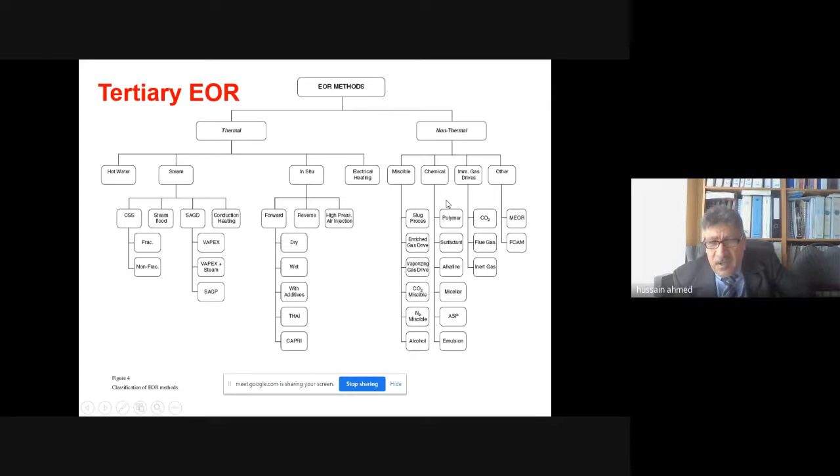Shall I do alkaline surfactant polymer? Shall I do surfactant only, polymer only, and so on? So you have a menu of EOR methods that could be suitable later on.

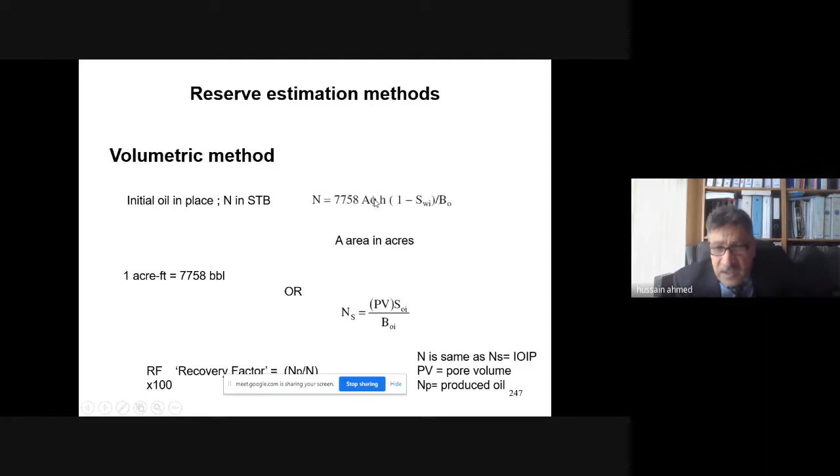Also part of the reservoir engineering job is to know how much oil is in place, and there are so many methods to go through. I have no time to cover them all, but simply you need to know porosity. Remember, reserves have connection with porosity - I mentioned that earlier. So porosity, phi, is connected to reserves. It could be an easy equation like this, or could be a very complex equation.

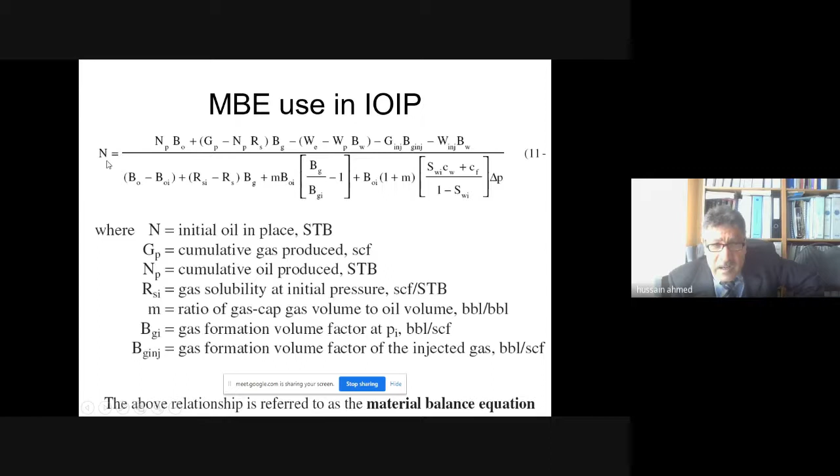We call it the MBE equation, like this - a big equation. This is more accurate to give you exactly how much initial oil is in place. Capital N here is how much oil in place. You can use this equation to estimate how much oil in place, and that's important too, and you can modify as well.

I think I'm coming to a conclusion now, which is at the end of the day, your understanding for your reservoir needs from you a good technology background, a good mathematics background, a good geology understanding, physics, and by this it gives you a good understanding for the reservoir to be understood.

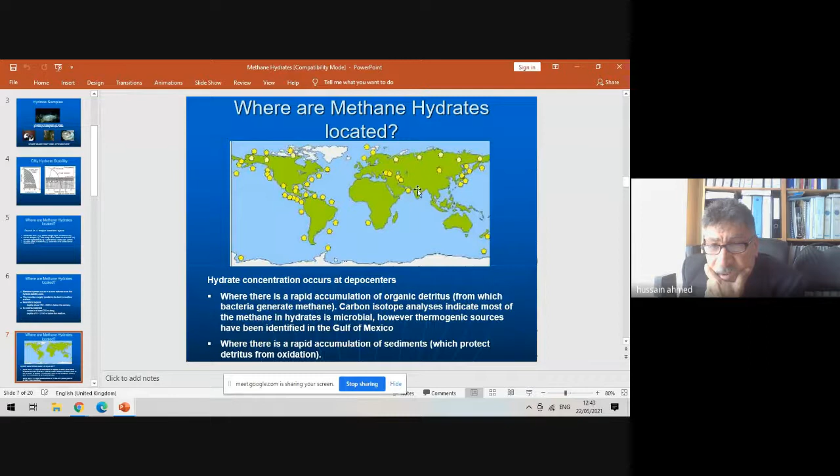This is the hydrate. So usually it is a big piece of solid rock, mixed between water and hydrocarbon, looking like an icy shape. We call it the hydrate, and it exists in, I think you have it in India. This is India. Where is India in this map? Somewhere here. Yeah, should be here. So yes, in India, they have some hydrate anyway.

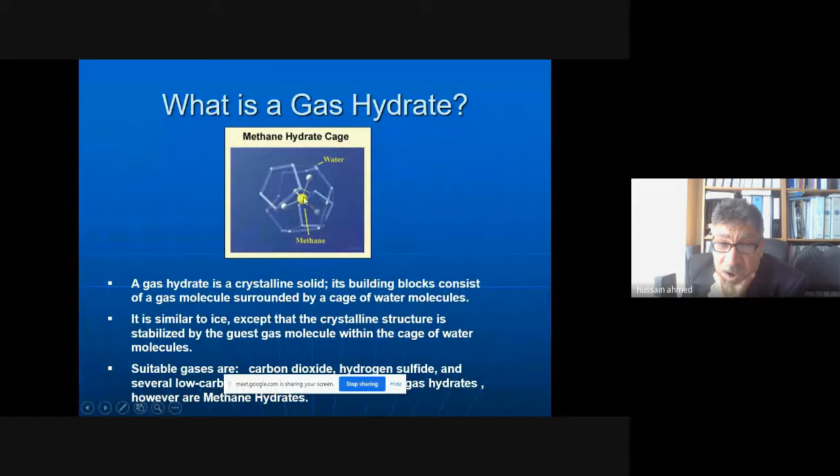And the other one he talked about, the gas, is the natural gas phase. The hydrate as a chemistry, this is the hydrate as a chemistry. You see this yellow one, the yellow is the gas, and it is surrounded by some kind of crystal water. We call it the gas hydrate. I hope that answered him. Yes, sir. Thank you so much. Thank you.